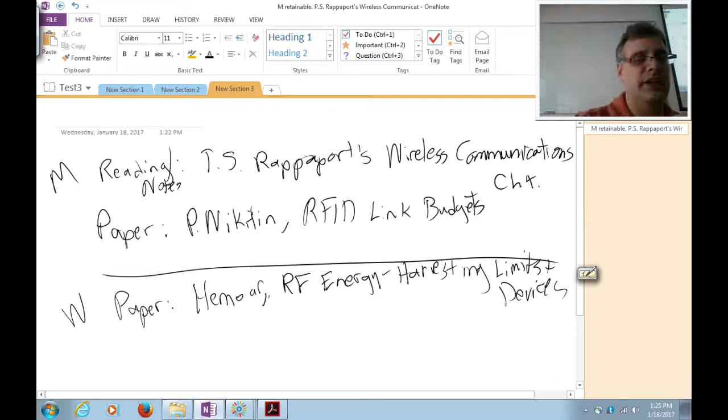Okay, any questions about the uploaded materials? No? So Rappaport's chapter 4 that I've excerpted and placed online is considered kind of the gold standard of the cellular industry. His book was the first textbook in wireless communications, published in 1996. It was pretty early on in the game. And that textbook became very widely adopted and is still one of the most commonly used textbooks in courses in personal and mobile communications, for example.

And my old advisor is actually a propagation guy. That's where he got his start. He was making measurements back in the 80s in factories and offices and measuring propagation. And everybody said, "What are you doing measuring all this propagation? What good is that for?" And then, in the late 80s, he finishes up his PhD, gets an assistant professorship, and the U.S. government decides it's going to allocate the next generation cellular band.

They're going to put PCS at 1900 megahertz, which had never been measured before, at least not in the scenarios they were talking about, outdoor to indoor, indoor to indoor, lower tier cells, where the crude modeling people had done in the past for UHF and VHF propagation just didn't cut it anymore. Well, here comes Ted Rappaport with all these great measurements and expertise. So it was the right expertise at the right time at the right place. And he was able to parlay that into the world's first wireless textbook.

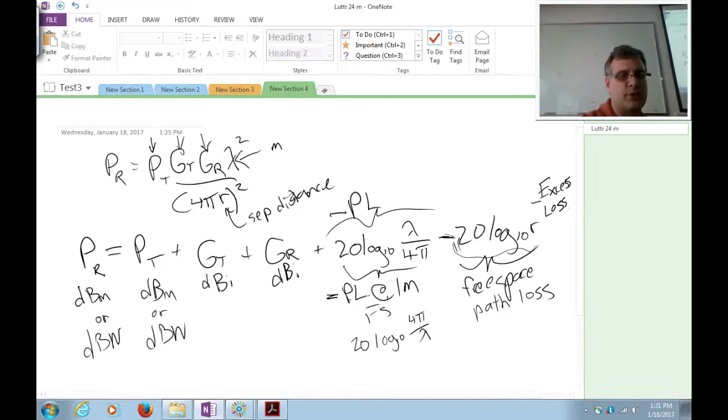And then, of course, you want to add extra losses. Call it excess loss. And there's two things that I'd like for you to pay attention to in Dr. Rappaport's article or chapter there. They're two interesting models that make a lot of sense when it comes time to do propagation modeling. One of them is path loss. When you plot path loss in the dB scale, this is path loss with respect to 1 meter free space. I go to 1 meter, and then whatever I get on top of that free space path loss is what I record here. And I plot that against log transmit receiver separation distance, actually 10 log 10.

What happens is, okay, the environment is very complicated. There's all these physical mechanisms that cause additional loss in the propagation environment. There are obstacles in the way. You've got to go through walls. You've got to go around walls. You've got to diffract. You've got to reflect off buildings. And so the real world here on planet Earth is very complicated, and it winds up being very difficult to predict. So, not surprisingly, if you go around and measure a bunch of path loss as a function of transmit receiver separation distance, you're going to get this huge scatter plot. You get a couple of outliers there too.

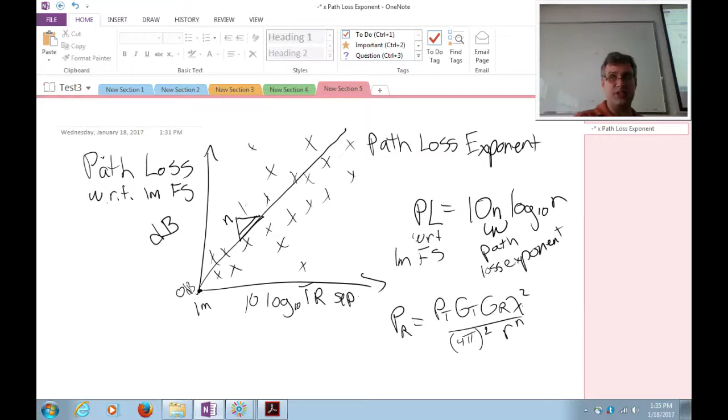10 dB is a factor of 10, 15 dB is like a factor of, I don't know, 50, 30, something like that, 30. That's a lot, plus or minus an order of magnitude and a half.

But it turns out that that's usually good enough to design a cellular network. So just with that one piece of information, the path loss exponent, you can capture the behavior roughly of an environment. If I am outdoors and I've got a transmitter on a tower and I'm communicating to a personal device in this area, my path loss exponent, because of all the high buildings, that fits the data probably close to like 3.5, 4 even.

If, however, I move a little bit farther away from the city center with less buildings, maybe more houses and that sort of thing, the path loss exponent drops down to like 2.7. And if I get into relatively flat with some sparse trees, maybe farmland, then path loss exponent can go down to like 2.4 or 2.5.

If I go indoors, it shoots back up again. I got all these walls to get through, so things become very lossy. Not uncommon to get path loss exponents of 5 or 6, or even higher. There are some scenarios indoors, however, where you can get path loss exponents less than 2. That's less than free space. How would that be possible? Can anybody think of an environment that would happen in, where on average you would get more power than free space?

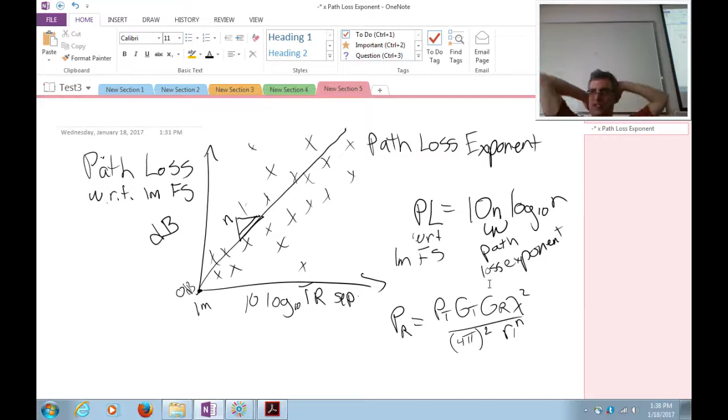But this is nice because anytime you change the frequency significantly or change your environmental configuration or just try something new in terms of your environment, whether it's frequency, stuff in the area, you got to go in and remeasure your path loss exponent.

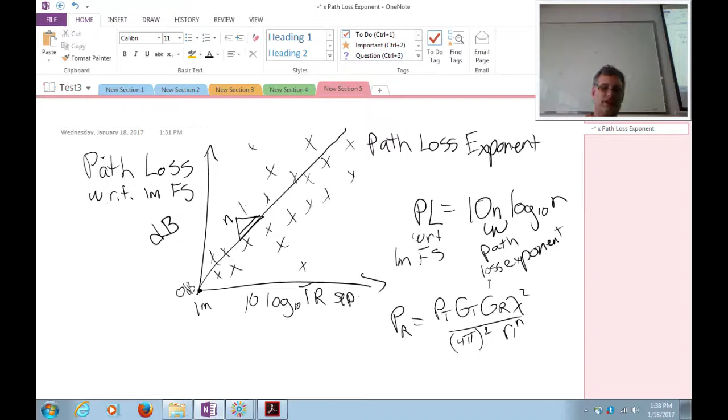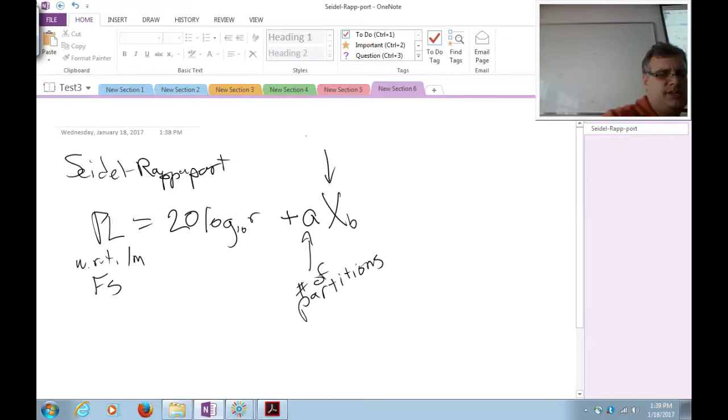And then there's another model. This one's called the Seidel Rappaport model, where path loss with respect to 1 meter free space is equal to 20 log base 10 R, so free space path loss, plus additional factors: number of partitions, and this is partition loss. So sometimes this is called the partition model, although the formal name should be the Seidel Rappaport model. And you can have as many of those terms as you like.

And this model is interesting because it adds a little bit extra site-specific information, and it gets a little bit better accuracy because of that. You can get accuracies down to like 5 or 6 dB in many instances. It's a lot better than the path loss exponent model. But the price you pay is more complexity. You have to find a way to get more information into your propagation model.

So for example, one of my grad roommates in college, his name was Roger Skidmore. He started a company with Ted Rappaport, and that got sold to Motorola. And their core product was this planning tool that used the Seidel Rappaport model.

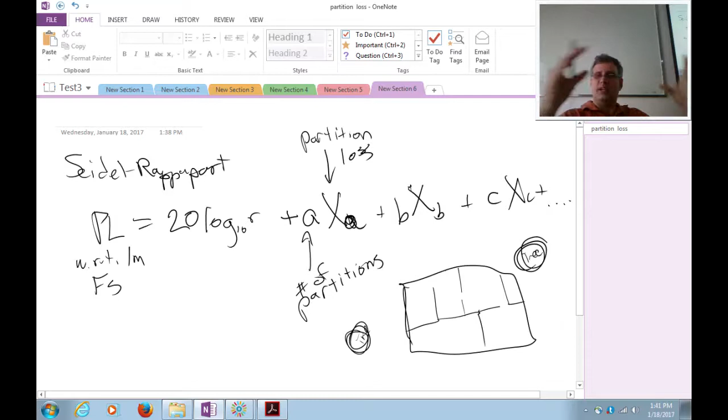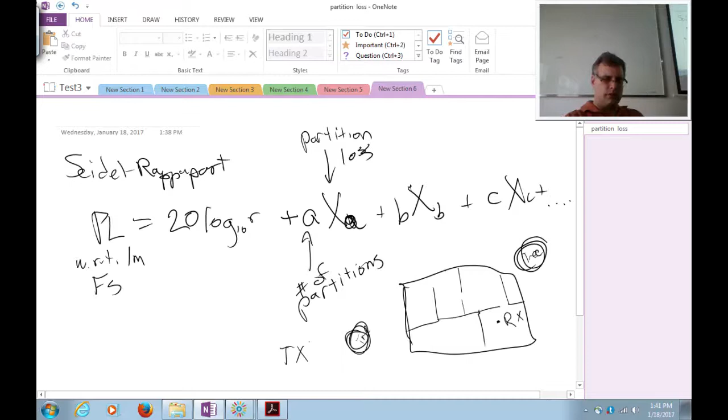And he could basically suck in a blueprint from a building, for example. Say here's a building. It's got rooms in the building. Here's the blueprint. This is a terrible building. And let's put some trees outside there. And you could drop transmitters and then predict, make a heat map in real time. So for example, if you had a transmitter here and a receiver here, what would the Seidel Rappaport model predict?

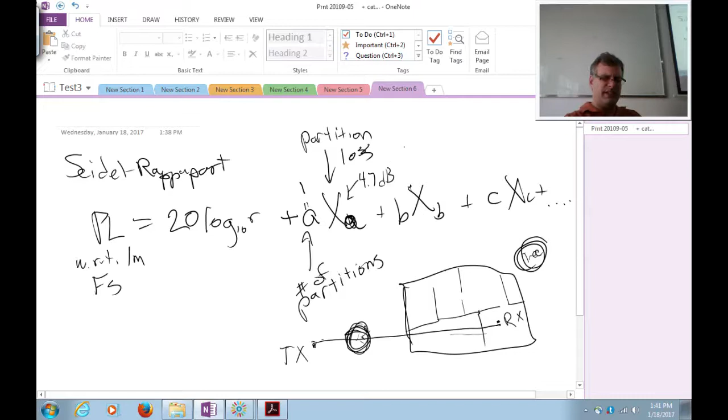It would draw a line between those, since it's easy for a computer to figure out distances between points, and then do intersection tests to figure out what type of stuff is in the way. So you would do 20 log base 10 of the separation distance, as if this was free space, but then you would add excess loss. You would say, oh, I've got one tree. And trees introduce, on average, a 4.7 dB attenuation per blockage at the frequency that I'm working at.

And then I am intersecting one outdoor brick wall. B is 1, and a brick wall introduces about 12.0 dB of attenuation. And I notice I have to go through one interior wall, a plaster wall. Plaster walls maybe only do about 3.7 dB at the frequency that I'm after, and there's only one of those too. So you just subtract off losses based on the type and the quantity of stuff directly in the link.

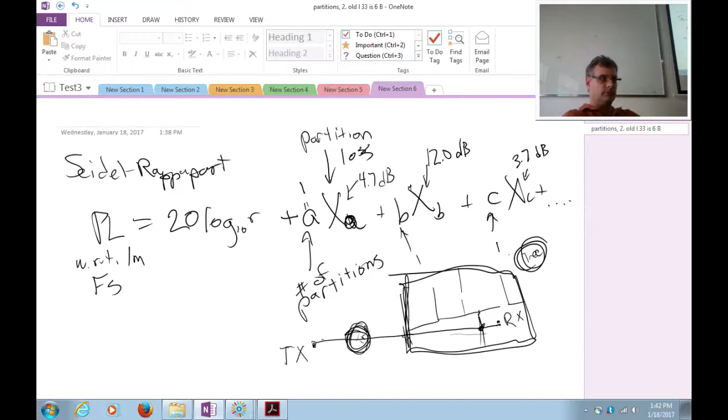So anyway, those are probably the two most important takeaways from that reading that's online in terms of propagation modeling. Does anybody have any questions before we move on? Okay. That's fine.

Okay. So let's take a little break from all the equations and analysis and talk about automatic vehicle identification. So the AVI systems have been around for a long time, especially in the proposed form. They really started to be worked on in earnest in the 70s.

And the whole idea behind AVI, this encompasses a lot of different applications. We can talk about highway tolling, often called open road tolling, which is what we think about today. But you can also use it to restrict access, like think a parking deck. And you can use it also for tracking and telemetry, to name just a few. You use it as an electronic license plate.

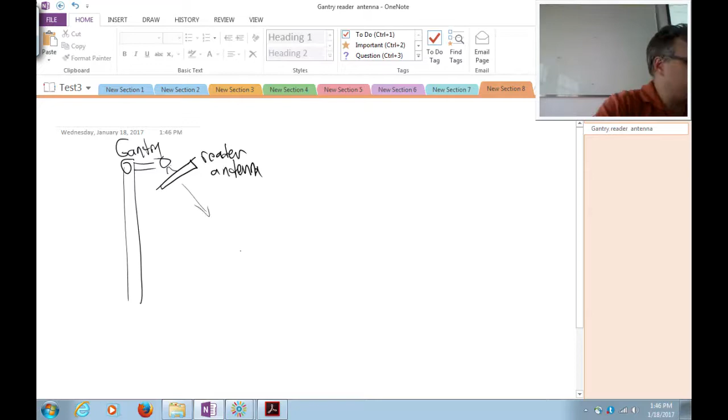So, what does an AVI system look like? We usually have this thing called a gantry. It's a big superstructure that goes over the road, and you put your transmitter reader antennas here. And you kind of angle it down, and there's an illumination zone. And you engineer the illumination zone so it covers a specific area on the lane. Remember, this is a three-dimensional problem, so you might have a multi-laned highway that you're tolling cars on, and you may need to figure out which lane they're in, so that you debit the right account and know the right person has gone through the right lane.

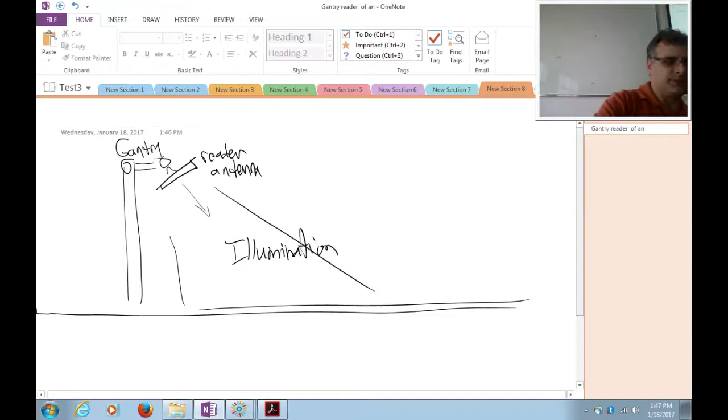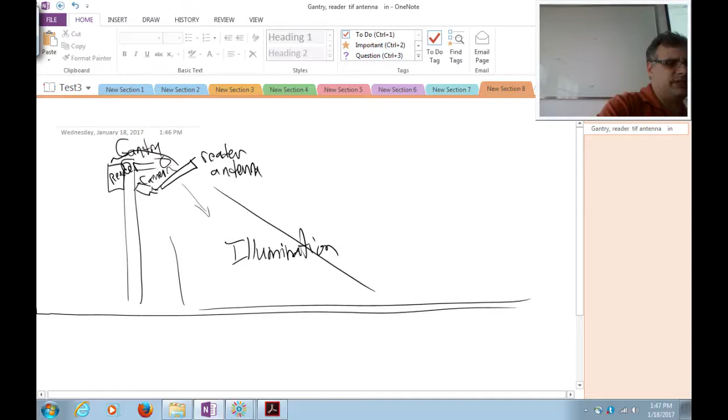And of course, there's all the other components up here. There's often an electronic reader up near the top. There can be a camera. Sometimes the camera just needs to take a picture of the car so that they can mail you a picture of your car when you didn't pay the fine or the toll properly. Other times the camera is used to read your license plate and do character recognition on your license plate. It's sort of a backup in case they don't get a proper read off of the RFID tag.

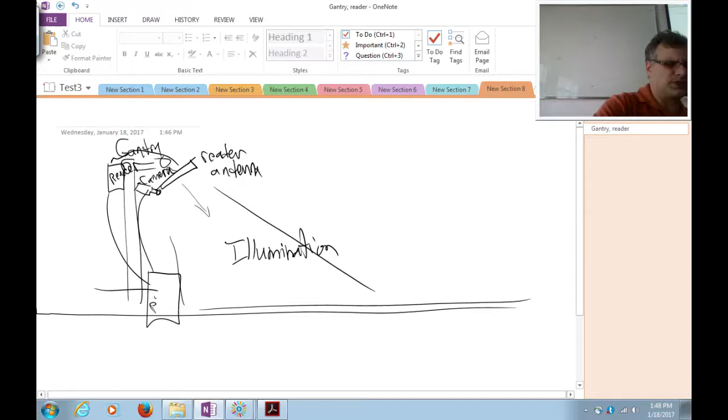And these are all connected, along with other peripherals, to a roadside unit. This is sort of the brains of the operation. This coordinates all the peripherals, the reader, the camera, any other things like maybe a gate that opens or closes when the proper toll is coordinated, or sometimes there are some inductive sensors to sense the presence of the vehicle.

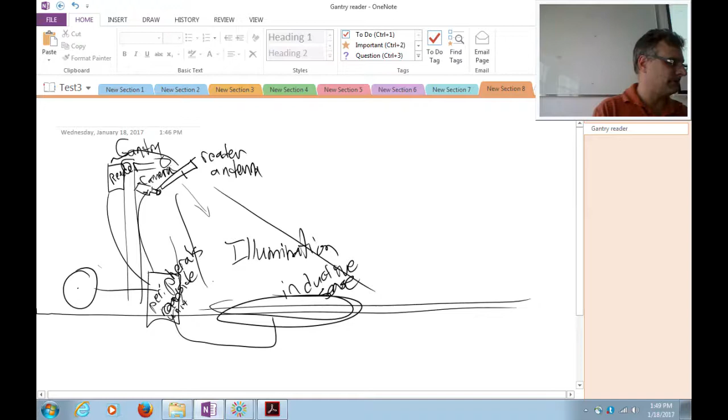So these automatic vehicle tolling systems are actually quite complicated. They're really multifaceted embedded systems projects that require a lot of engineering. And there are only a handful of companies in the world that do that. And of course, the tags on the cars, there's a tag. This is supposed to be a car.

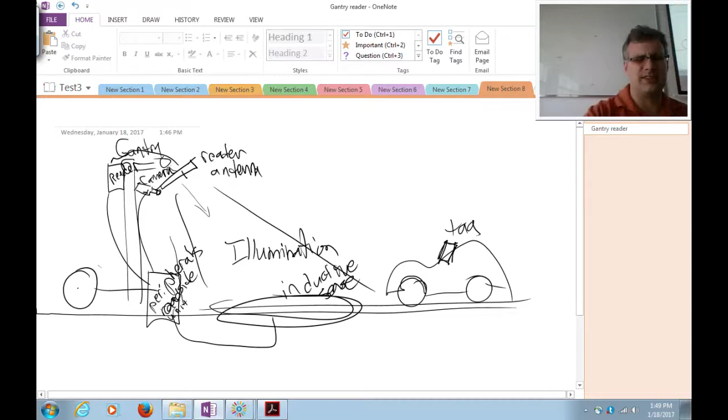Tags nowadays actually have the ability to harvest the RF energy. There are several versions and protocols of highway toll tags that harvest the incoming wave and then use modulated backscatter to send back identification information to the reader.

And this is a multi-billion-dollar industry. At least the tolls they collect is a multi-billion-dollar industry. This is a hundreds of millions of dollars industry in terms of worldwide equipment annually.

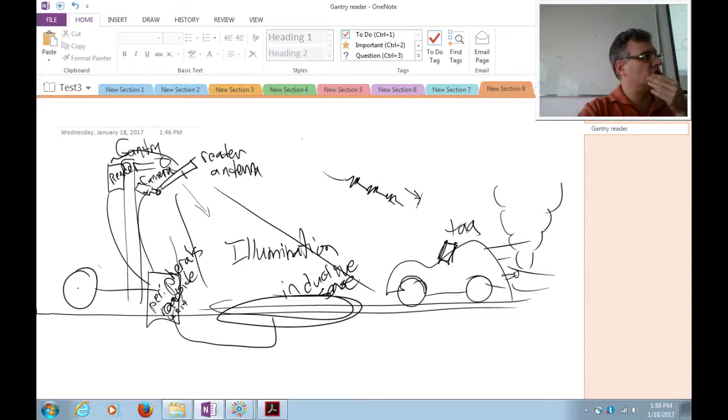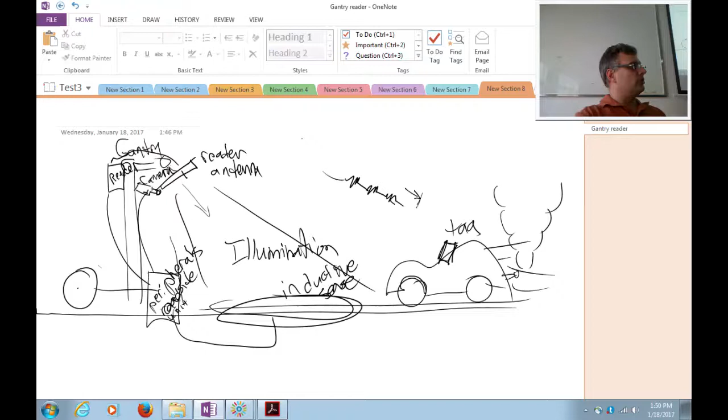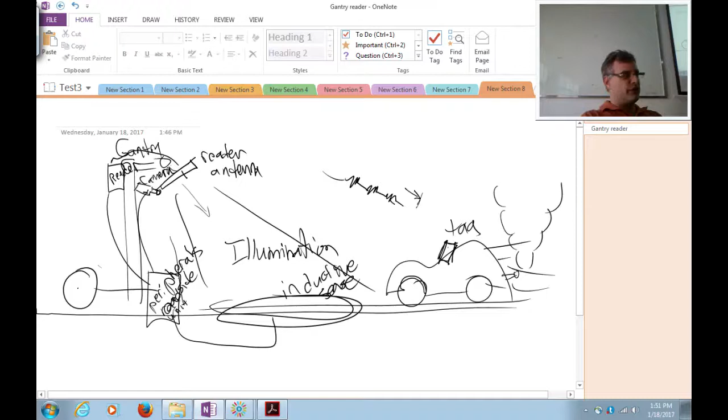The tag is usually behind the car, and then how if it is not illuminated? Oh, this is a good question. So, where do you put a tag normally? At the back, like of the car. So it depends on where you are. Different tolling agencies have different practices and different types of tags that you can place in different things. So for example, one of the things you have to worry about with this tag is in North America, everybody puts them on the windshield because that winds up being a really nice angle to cover as you go under a toll tag.

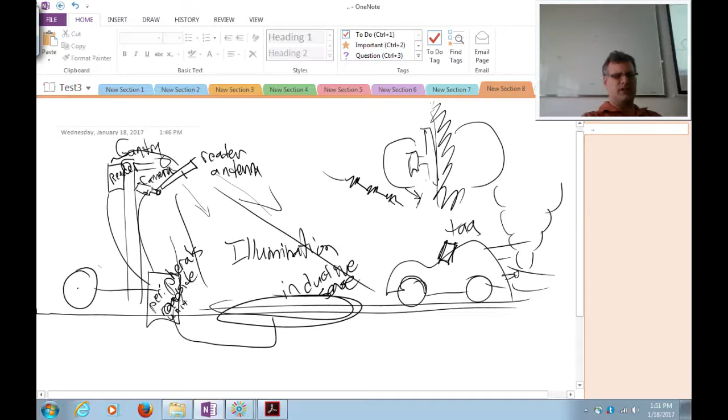And it turns out that RF passes through glass and plexiglass almost losslessly. There's only a slight degradation. In fact, sometimes there's a slight enhancement because you have this thing called pattern sucking. If you put an antenna, a little folded dipole with a chip, next to a lossless dielectric, the pattern gets a little bigger in this direction and a little bit smaller in that direction. So you actually can get a little bit of gain if you get the right dielectric up against that. And so that's when it's placed on the windshield.

Now there are other worldwide tolling agencies that will put it in other places in the car, or by necessity they'll want to put it on not just maybe a truck windshield, but also on the truck trailer that it's pulling. Whereas some people that are driving a motorcycle, here's my hog, tend to put it on the gas tank, which is metal. That causes all sorts of propagation problems because you're taking an antenna and laying it down on a conductor and essentially shorting it out. You have very bad mismatch losses. No matter how hard you try, it's almost impossible to undo with matching circuitry.

And so this is one of the reasons why they almost always have some sort of camera to do optical recognition on your license plate. Optical recognition on your license plate in and of itself is not the most reliable technique. You get dirt on your license plate and you misread the numbers, or the person drives by too fast, or maybe they took the plates off the car. Or sometimes the pattern recognition fails. It's a statistical process. It doesn't always work right.

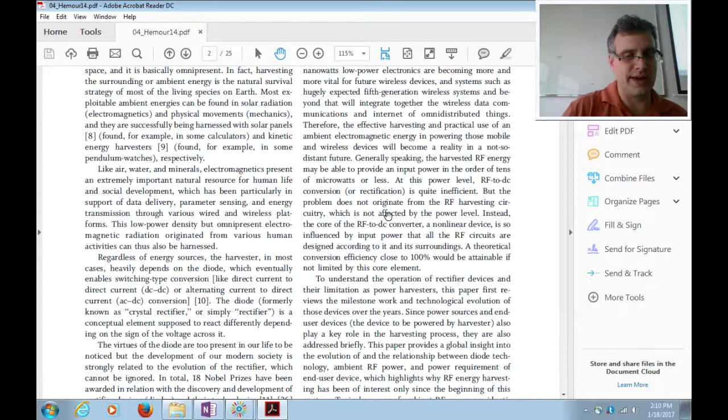Let's talk about what this is. This is written by Hemour and Wu. There are a couple really good graphs here I wanted to talk about, and I want to talk about a derivation that they do in here and kind of explain it in detail because it gets to the heart of energy harvesting. It talks about some fundamental limits, and then some of the devices that you can use in the future. There's a really good historical overview. He's got this picture of an arc radio transmitter from 100 years ago.

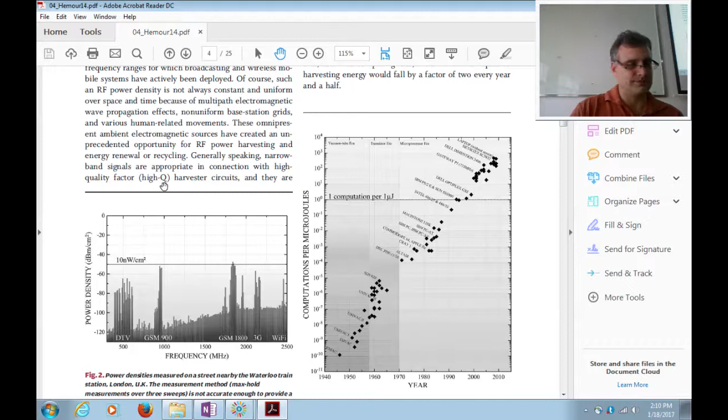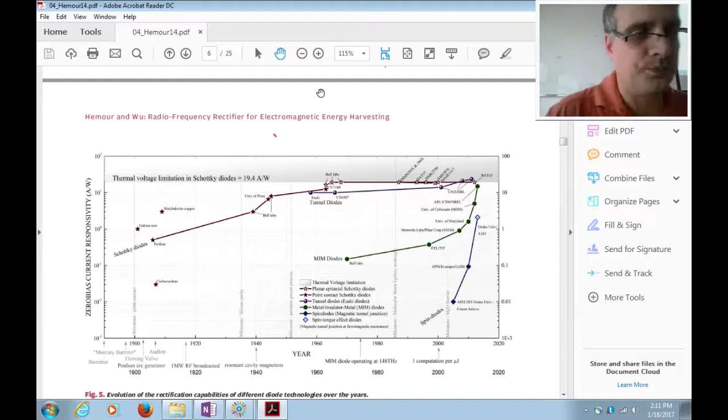Oh look, the Koomey graph again. You can't get away from it. The one that I'm most interested in showing you is this plot right here. So I'm going to get some annotations here. Let's see. Can I draw? Maybe not. Let's just get back to the graph here.

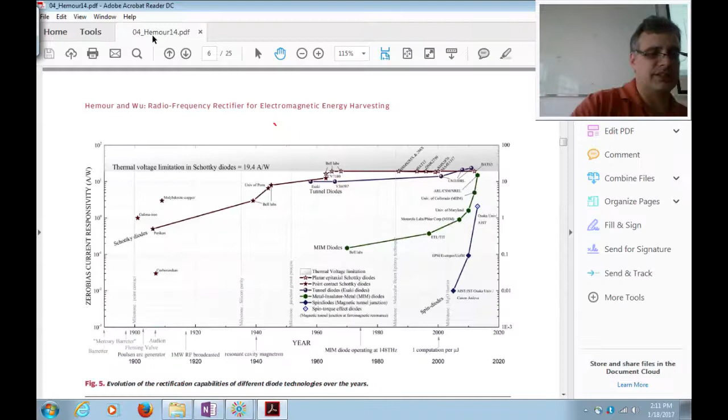This graph is a graph of different devices. So you see here we have on the horizontal axis time, year, up until the time this paper was written, which is just about a year and a half ago, 2015, 2014. And each of these lines represents a different type of device that's been used in RF energy harvesting.

So of course, what's the one all the way over here? Schottky diodes, that's right. Now, regular diodes have been used too. He doesn't really graph that, because Schottkys generally have lower turn-on voltage, so it cuts right to the more efficient way of harvesting energy. And of course, we've known about Schottky junctions for a long time. Remember, the transistor and the doped diode occur in the 1950s, late 1940s. But we knew that if you put metal next to a semiconductor, you get a Schottky junction. There's a charge diffusion, barrier regions, nonlinear response that results from the junction of those two materials.

And people were making detectors out of those pieces of electronics as early as the 1900s, 1910s. And you see here on the left-hand side, this logarithmic axis is something that they call zero bias current responsivity. That is a big word, and I'll explain what they mean by that. But what they really mean by responsivity is how curvy the VI characteristic is. Okay.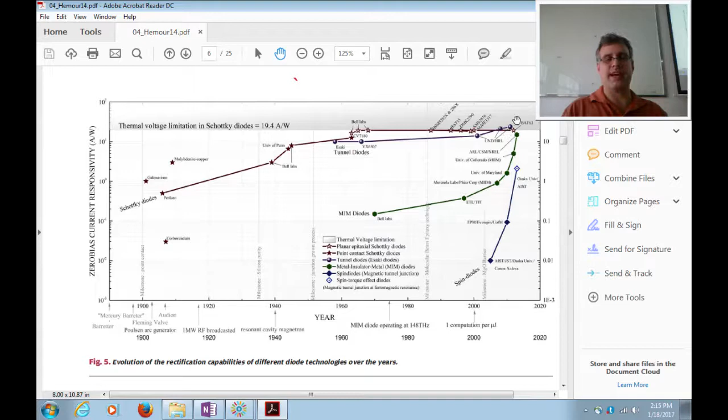And his point in this paper is that there are some of these newer technologies that are rapidly promising to sort of break the barrier when compared to the thermodynamic limit for Schottky diodes. In fact, there's this one point, I don't know if this might come from the author's earlier work or another work. He's written some papers recently on the tunnel diode as a harvester. You see it already poking above the thermodynamic limit of the Schottky diode. So that's promising. Anyway, it's a good read.

And now I'll switch to a little explanation of a derivation that they do in here that's actually very important. So let's start off with just a regular diode. Here's my diode.

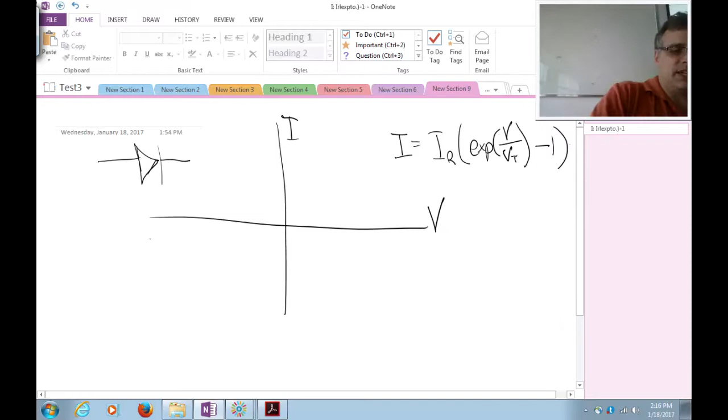And every diode has a VI characteristic, right? Voltage on the horizontal axis, current on the vertical axis. And I can sort of write a generic diode equation: I is equal to some sort of reverse saturation current times EXP of the input voltage over some sort of threshold scaling voltage, minus 1, right? And this gives us a familiar form. Anybody who's studied electronics has seen this curve before.

It's this kind of exponential nonlinear response that a diode has when voltage is excited across it. In one direction, it quickly starts acting like a short circuit. In another direction, it quickly has the slope of an open circuit. And here it's kind of somewhere in between. Okay, that's good enough. Now, you'll see this is almost device agnostic. I've just put some physical characteristics here. You could call this the threshold voltage. You could call this the reverse current, reverse saturation current.

And sometimes you'll see various forms of this. VT for a Schottky diode, for example. What is this a function of? Well, people have often written this as N times V little t, where we call this the thermal voltage. N is your ideality factor. It's a unitless number, ideally 1. Ideality factor, or sometimes ideality coefficient.

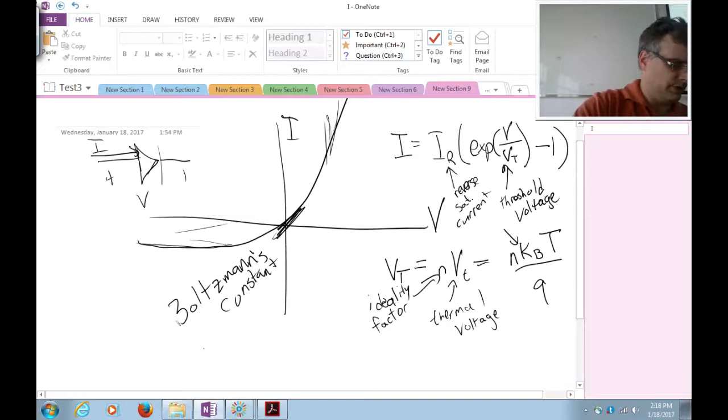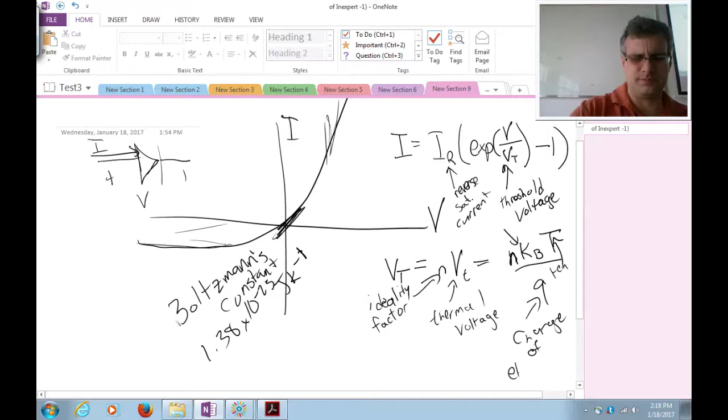And then the thermal voltage can be written as KB times the operating temperature over Q. This is Boltzmann's constant, which of course is 1.38 times 10 to the negative 23rd joules per Kelvin. This would be the ambient temperature in Kelvin. And of course the ideality factor, ideally that should be 1, and then Q is the charge of an electron in coulombs.

Real quick, give you the value of that so that you can have it in your notes. And that should be it. No, internet's out. You can look it up.

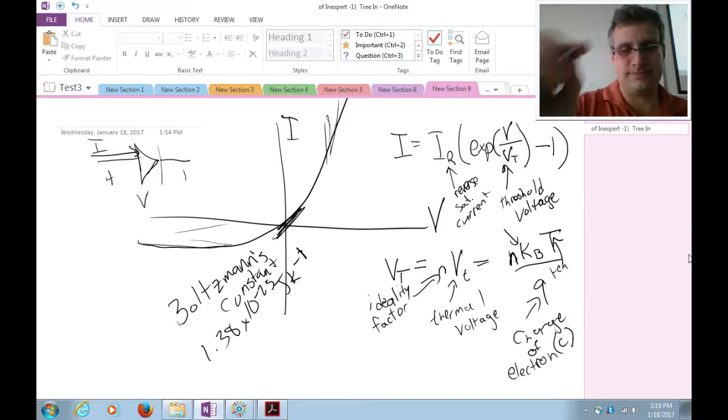Okay, the interesting thing here, of course, is that all of these we actually don't have very much control over, right? We've got Boltzmann's constant. That's a fundamental constant. Nobody's got control over that. Q, charge of an electron, you can't change that. I guess you could change the operating temperature, but this is in the Kelvin scale, right? So if we're talking about temperatures that we live at, that's actually a very narrow range in the Kelvin absolute scale, right?

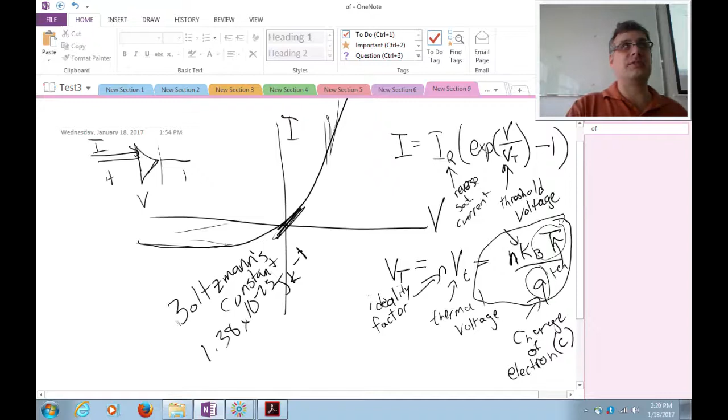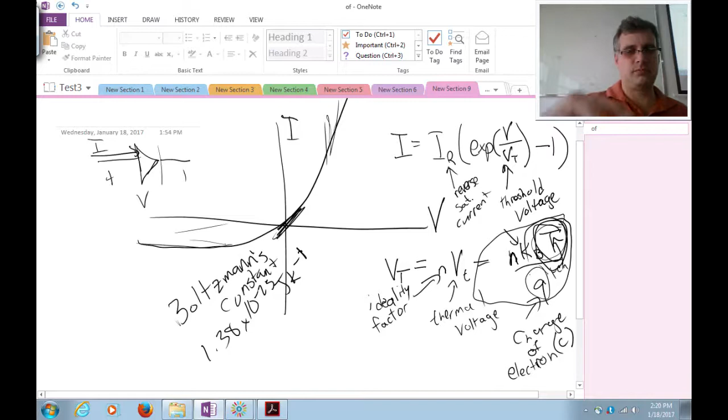Freezing is 273. Kind of Shenzhen weather in the summertime is about 300 Kelvin. There's not that much room in between, right? That's a 10% difference at the end of the day. So we really don't have that much control over this thing either. So what does that all mean? So let's say we had our old diode equation. I is equal to IR EXP V over ideality factor thermal voltage. This is part of the proof that Hemour does in his paper.

So let's expand this as a Taylor series. Do you remember your high school Taylor series for EXP to the X? That's equal to the sum from n equals 0 to infinity of x to the n over n factorial, right? And from that you can actually just get the Taylor series without doing all that differentiation. This is basically equal to 1 plus x plus x squared over 2 plus x cubed over 6, etc.

And one of the important things to realize about this is that when we talk about energy harvesting in our world, especially the low-powered world, x is going to be small. So as a Taylor series, I can take just the first 3 terms of this and get a pretty good estimate of what's going on. So what I'm going to do now is plug that approximation into these first 3 terms here.

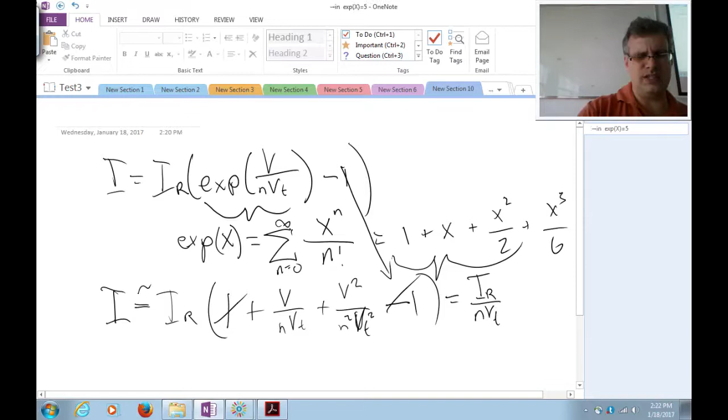So I got 1 plus V over N VT. Okay, that's my linear term. Now I also have the squared term, V squared over N squared VT squared, minus 1. I'm just going to bring down that minus 1. Of course, that cancels with the plus 1 there. So what I really get is IR over N VT times V times 1 plus V over N VT.

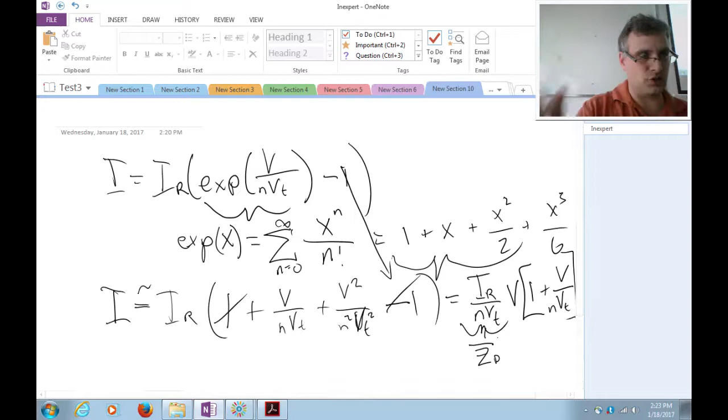This guy over here, I'm going to call this 1 over ZD, the impedance of my diode. That's basically the small scale resistance I would see when I put the diode into an AC circuit and give just a little bit of AC across it. It'll look like it has that resistance. But of course, it's nonlinear, so really I can't ignore this last term as well.

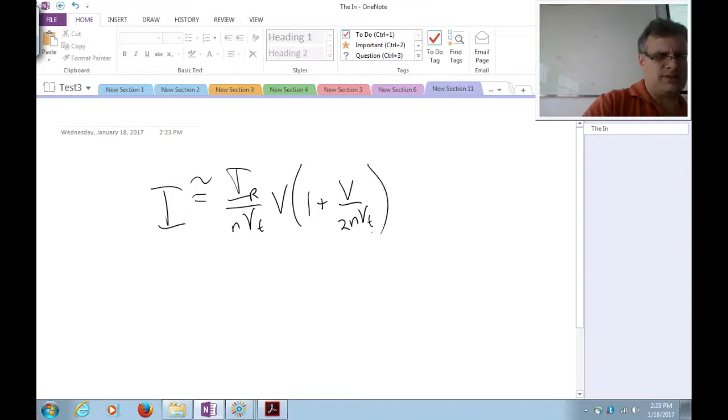And the key to this whole analysis is to look at the responsivity, which he defines as basically the second current derivative at some particular bias point. In this case, we're going to use V bias equal to 0.

Professor, where did the 2 come from? Where did the 2 come from? Was it on the previous slide? Yeah, that should be part of the Taylor series expansion. If you multiply this together, you should get what we had on the previous. Hopefully I didn't drop a 2. Okay.

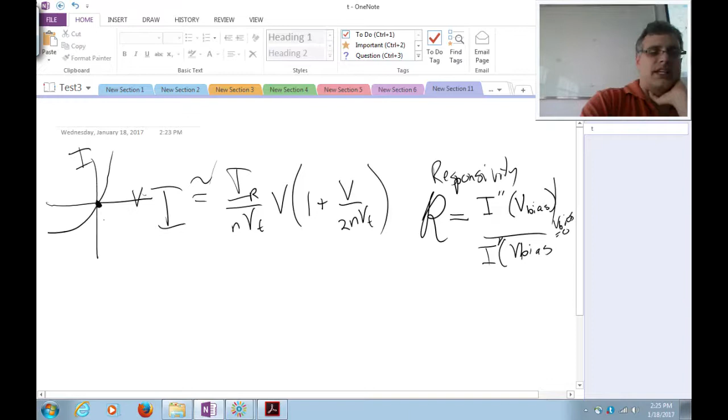So this responsivity, this is actually the second derivative of current as a function of voltage divided by the first derivative of current as a function of voltage. And you can kind of think of this as quadratic curvature. How curvy is that diode characteristic at a particular point? We're almost always interested in the 0 bias point, where the bias is equal to nothing, because that's what a cold start device would experience.

In energy harvesting, you can take electronic devices like diodes and do something called body biasing. It's like you give a little bit of bias, and in some instances that makes them work better. We're not going to concern ourselves with that, you could spend a whole course just talking about diodes. We only want to spend the next week or so doing that.

Okay, and so what would it be for this Schottky diode? Well, the second derivative and the first derivative of current. Let's do the first derivative of current first. We can just basically eliminate this term here and look at the slope. That's what we called 1 over ZD, or IR, saturation current, over NVT. And up here, if we take the second derivative, we find that that is actually 1 over NVT times ZD. So 1 over ZD, 1 over NVT ZD.

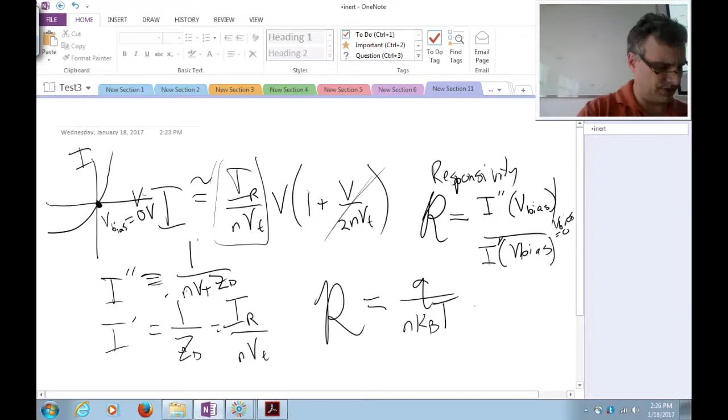Thus, the responsivity, when you divide those two, should be equal to Q over N, Boltzmann's constant, times temperature. We call this responsivity. So 1 over N thermal voltage, and it's really only a function of the ideality factor, which we say is 1, and then these 3 things which we don't have much control over.

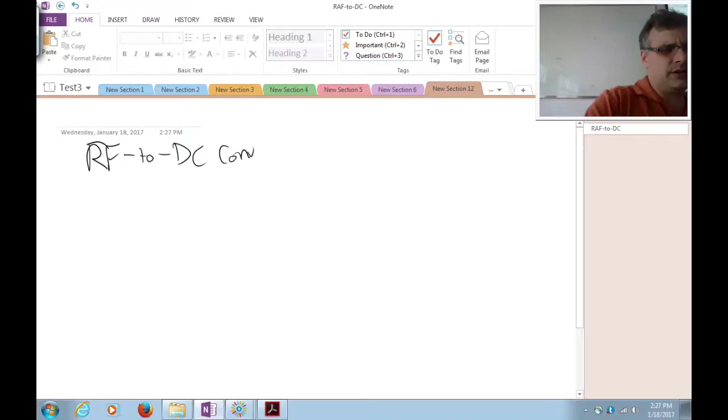And that's important because what Hemour shows in this paper is that your RF to DC conversion efficiency eta, so eta is some number between 0 and 1, 1 being 100% conversion, 0 being nothing, at low powers

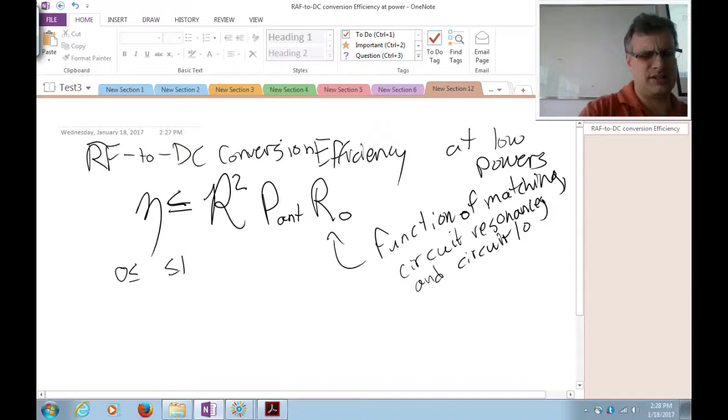this is going to be less than or equal to the responsivity squared times the power from your antenna times some factor R naught, which is a function of matching, circuit resonance, and circuit losses. But this is the real killer here, responsivity squared.

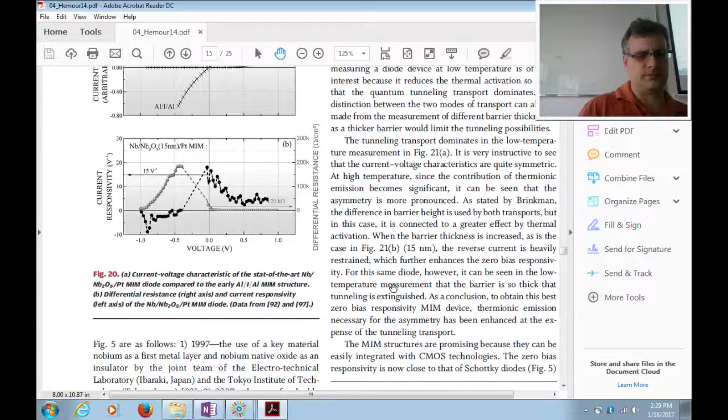We said that the efficiency is related to responsivity squared, and responsivity in the case of a Schottky diode can't be any bigger than Q squared over Boltzmann's constant squared, T squared in the denominator. And that's maybe the biggest takeaway from this paper. Go ahead and read through it. And he's got a sort of more long, drawn-out proof of this in this historical survey paper.

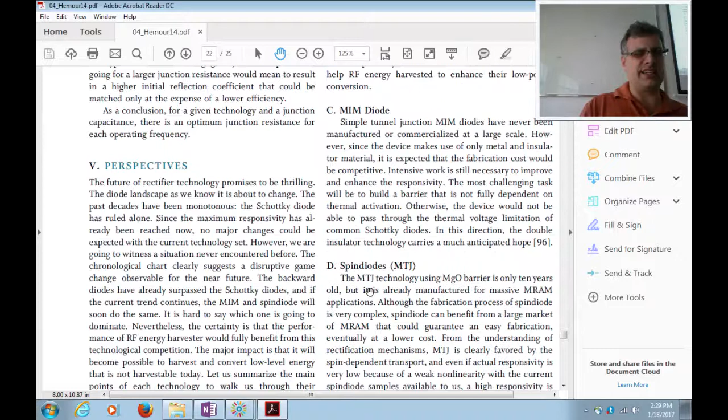But this results in that thermodynamic limit, what people often call a thermionic limit in energy harvesting. That's really what all these equations are. He's deriving that result. So that's the takeaway from this paper. Now there are also some other things, this is for Schottky diodes, right? Which is why we plateaued out at a certain responsivity a long time ago.

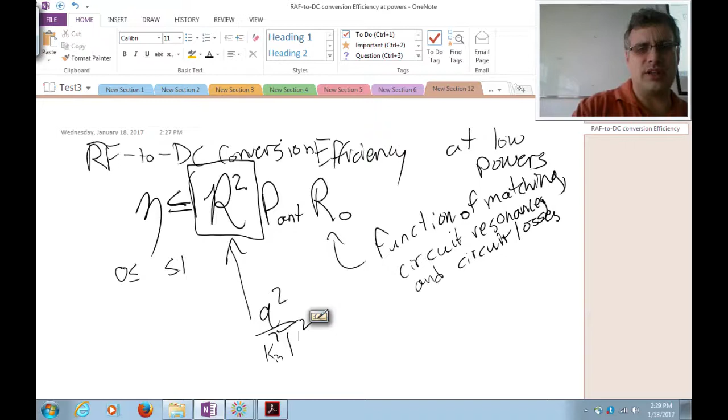If I could just illustrate the result graphically, what it's saying is that when you have a device at 0 bias, it almost doesn't matter what the device looks like. You could have a device with the following characteristic. At 0 bias, it's really the curviness, that second order curviness, which is what converts RF to DC, right? You think of it as a square law detector.

You know, the second derivative of the current divided by the first derivative is really the curviness at that point. And we're limited in a Schottky diode about how curvy we can actually make that point based on physical parameters. The charge of an electron, the average room temperature in Kelvin, Boltzmann's constant, ideality. Those are things that either we don't have control over, or we can't really change very much. And so what are some of the devices that have more promising responsivity?

Well, there's a whole list in here. I'll give you sort of the high-level version and you can read the rest for yourself. So we have Schottky diodes. We've actually done as good as we can possibly do with those. We pretty much can design a Schottky diode that operates at the thermionic limit. So these are good, but not getting better.

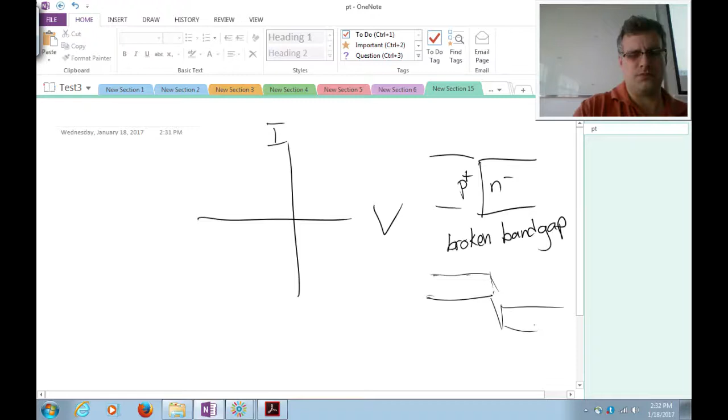Here's your N. And you actually make it so that the conduction band of one of your materials is at the same potential as the valence band of your other material. So what happens in that scenario is that your junction acts like an ohmic junction. You can actually get tunneling where carriers actually go into the band and then jump up to the conduction band in the other material. So here it looks like a resistive device for the tunnel diode characteristic.

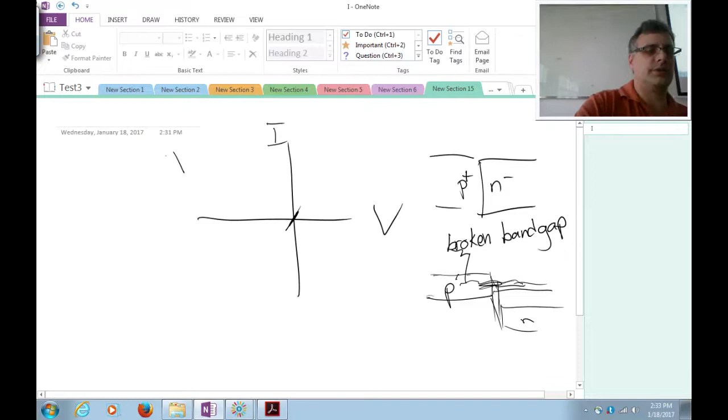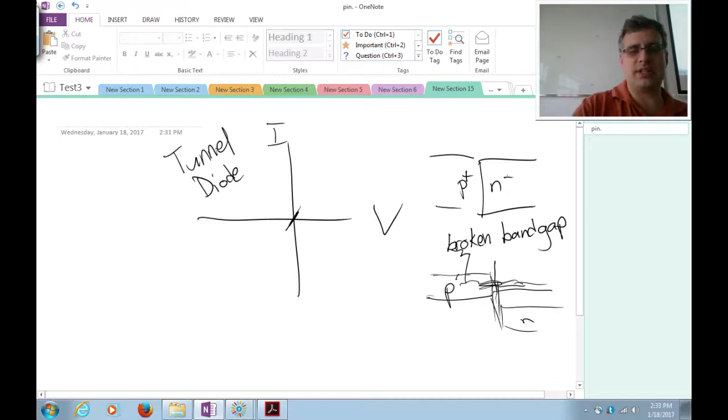And then as you raise the potential of this thing and kind of bring these back to more similar potentials, this starts to transition back into a diode characteristic. It looks like this. Let me flatten that out a little bit. It's a little more gradual than this. And so that's the classic characteristic of a tunnel diode.

It's a very interesting device because it's highly responsive. This change can happen on the order of tens of millivolts right here. And so that means that the second derivative is very high here, right? It's changing very quickly. And so if you reverse it, it's a little bit counterintuitive, but if you reverse this diode so that you put it in basically backwards, you can actually use this region as an energy harvester.

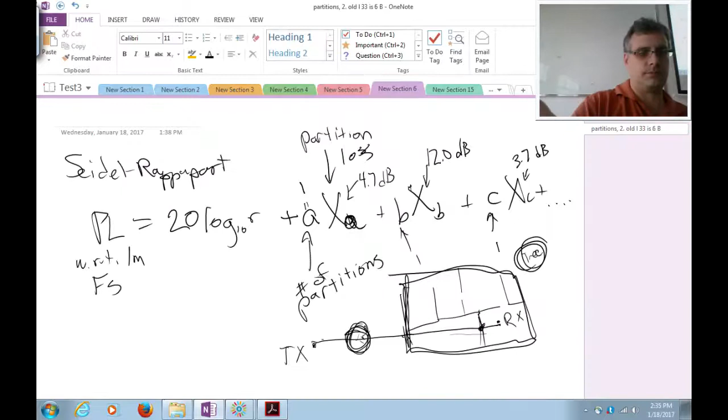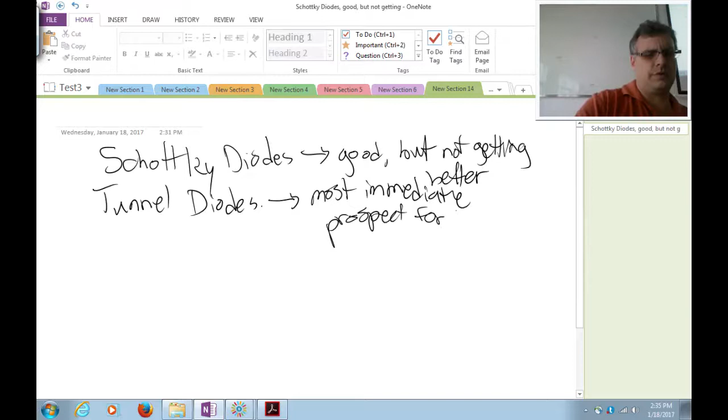And that's how they did some of those really high efficiency curves on Simon Hemour's paper in that big graph that I showed you. They used a tunnel diode and installed it backwards in the opposite polarity from what you would normally put a regular diode in for energy harvesting. So tunnel diodes, most immediate prospect for improved energy harvesting. Now, of course, one thing getting in the way is that we are still not very good at making tunnel diodes.

The tunnel diode was actually invented, I think it was about 1958 or 59, by a Japanese researcher named Leo Esaki. It was so cool to actually see a device exhibit quantum tunneling for the first time that he got the Nobel Prize for it. However, to this day, it is actually really hard to find anybody that will sell you a tunnel diode.

And the reason is, it's actually a neat device because it's got this negative resistance region, which means it makes very good oscillators and amplifiers. You can make reflection amplifiers out of it. You can make oscillators. If you bias it in that negative region, it should become unstable and start to oscillate.

However, there is always a cheaper way to do it with, say, CMOS devices, hooking up regular transistors in such a way, biasing them and making them have a negative resistance curve or serving as an amplifier or an oscillator. So it was a novelty. People were very excited in the 60s about tunnel diodes, and it just never really materialized. To this day, if you want to buy a tunnel diode,

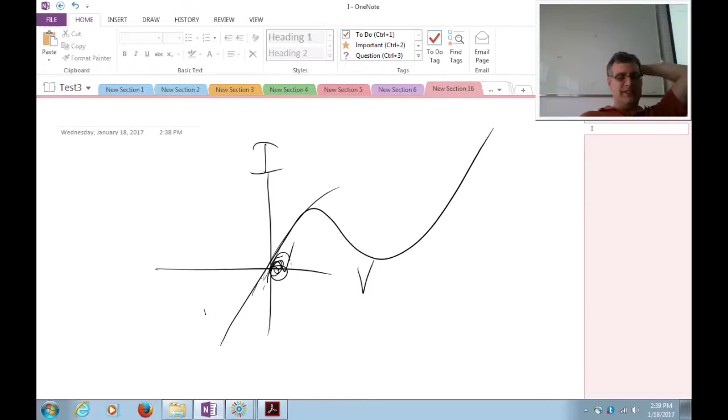My PhD student, Francesco Amato, just defended his thesis last week. I had to Skype in to the committee. And his thesis was employing tunnel diodes, not in energy harvesting, but in a low-powered communication system that would not have been possible without this device. Maybe we'll spend a day studying that later in the course, but it's kind of a neat experiment that he ran. So it's cool to use tunnel diodes again. That's what it comes down to.

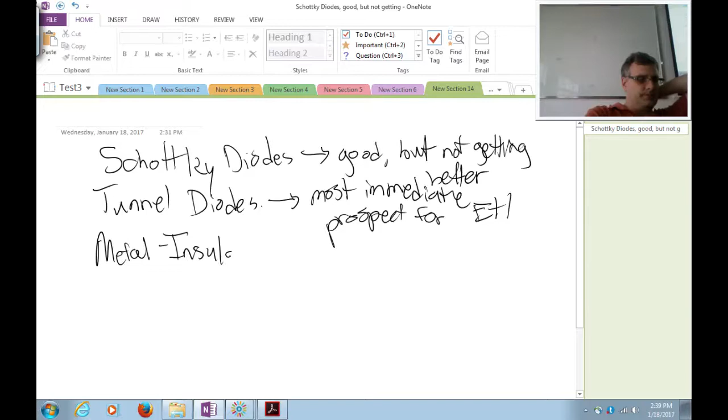And then there's metal insulator metal diodes, or MIM diodes. And these are promising but early. The physics theory behind these predicts high responsivity, but we haven't been able to build anything quite that high yet.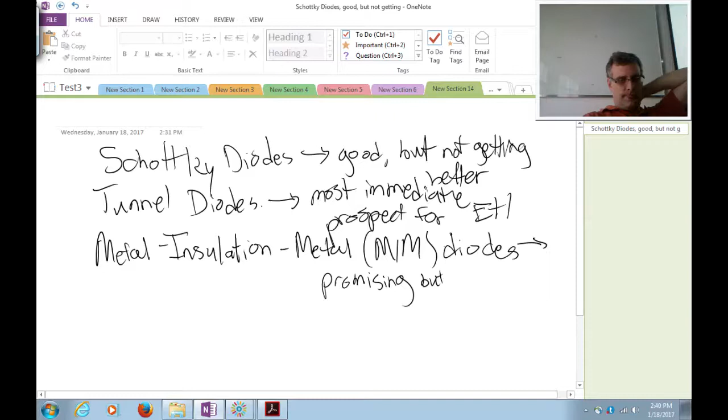And equally promising but early are these spin diodes that use a combination of tunneling and the spins of electrons to make a nonlinear thing. And that's very similar to the MIM diodes. They're promising but early.

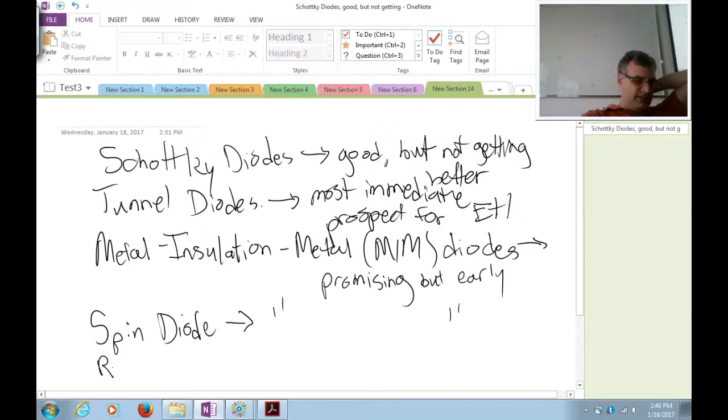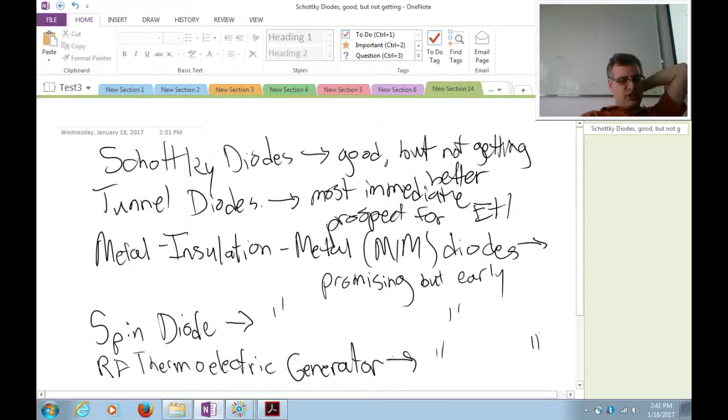And one thing that he's not mentioning in here that we'll probably spend a little time studying is something called an RF thermoelectric generator. Which, when you get to really small scales, we'll learn is actually an efficient energy harvester for RF, or can be. Okay, any questions so far?

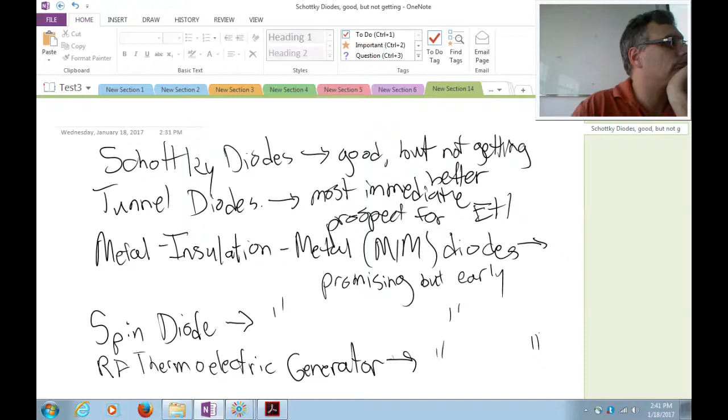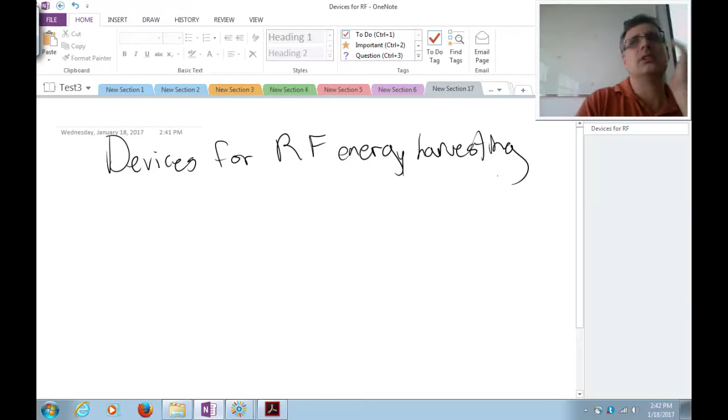Okay, well, let me shift gears and we'll do a little prelude to next Monday's lecture. We've talked so far about devices for RF energy harvesting, converting it to usable output power for driving circuits and logic and computation and sensing and all those fun things that we like to do with integrated circuits. So then the next thing we should mention is that that's not the only way to improve the efficiency of a harvesting system.

So if you think about an RF waveform, this is how classically we would harvest things. We have a sine wave and it strikes an antenna that goes into some sort of rectifier. And we talked about what rectifiers look like, what kind of diodes could you use in rectifiers. Just kind of scratch the surface. You could spend a whole course simulating rectifier circuits. That would be the most boring course in the world. So we don't want to do that.

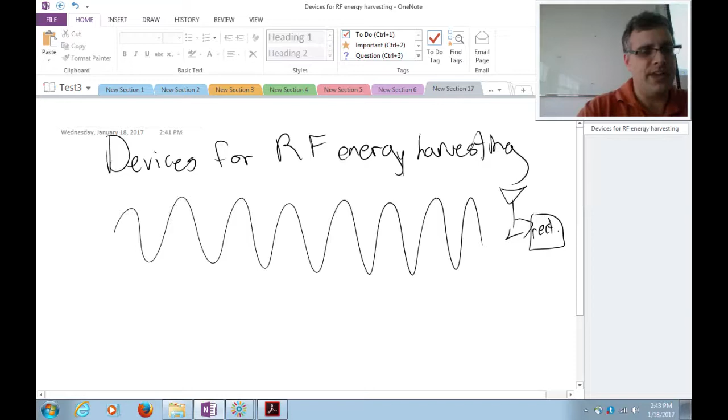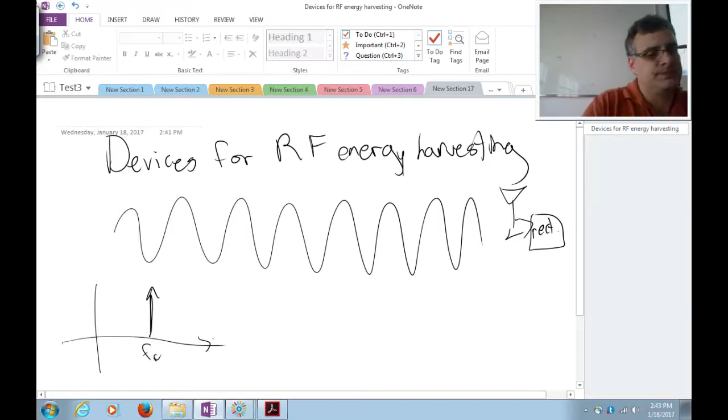Now, if I look at this signal on a spectrum analyzer, what do I see? The way I've drawn it here. Yeah, I see a little spike, right? At whatever the RF carrier frequency is. Call it f sub c. So now, there's a little brain teaser. What happens if I have a signal that looks like this on the spectrum analyzer?

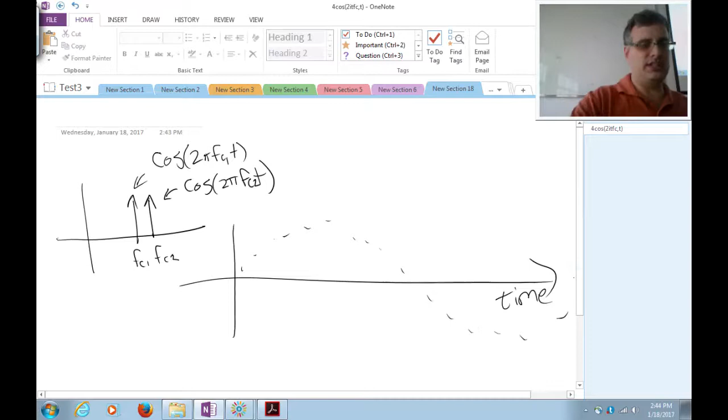Okay, so then let's change picture. Let's say I have a CW waveform that has the same time averaged power as my double carrier or two-tone waveform. And this is CW. So now let me ask you a question. Which one of these waveforms would be a better waveform to harvest for RF? Which one would convert more power?

I'm saying that the RMS average, if I average over a long time, is identical for these waveforms. So both of these, if you hook up an RF power meter, you would get the same number out of them. So 10 milliwatts, 1 milliwatt, whatever it is. Which one do you think would be better? The carrier waveform, because it will be of the same frequency. Mm-hmm. What's the benefit of being at the same frequency?

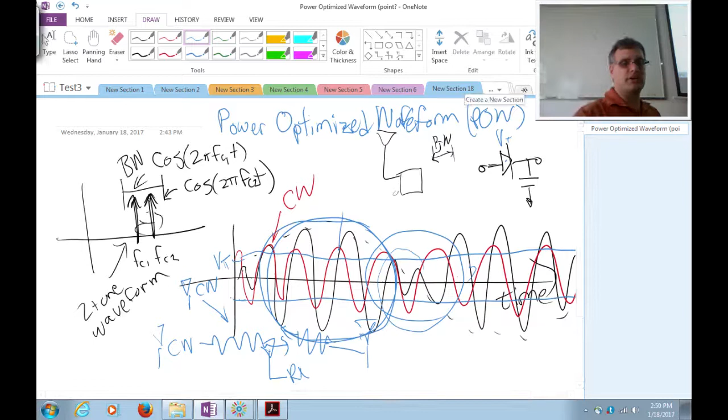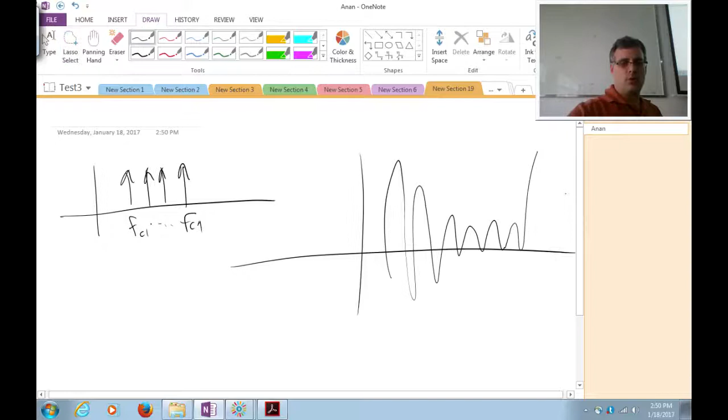And this is not necessarily a small advantage, because you can play this game for a long time, right? If you have, let's say, 4 tones that are very close together in RF, FC1 through FC4, what's that going to look like in the time domain? Well, now you'll have a really high peak. What happens is that the duration of the peak drops, but the peak value itself increases.

So you wind up concentrating more and more energy in a smaller period of time if you have more and more synchronized carriers. And you get conversion efficiency gains for that. So there aren't that many systems that actually practice anything like this at the moment. This was an idea that came out of research papers, some of it from our lab, some of it from the lab in Portugal. There's a company called PowerCast.

They've made a product where you can buy a chip, hook it to an antenna, and you buy another chip or a board from them, and that's their transmitter. And they don't do this, they basically do duty cycling. And it's mostly to get around the FCC laws in the United States. They basically turn the power on high, and then there's a little square wave low power, and then they turn the power on high, because the FCC says you can only transmit at this average power level.

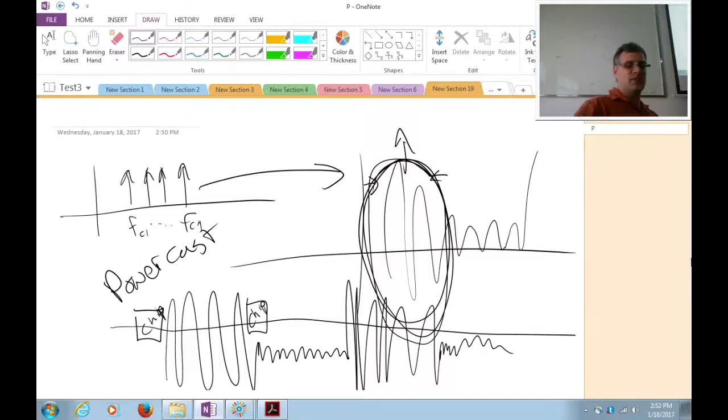And they define average power as, if you're transmitting digital symbols, you can average over multiple symbols. It's called average conducted power. And so this was originally conceived of as a way to increase the transmit power and efficiency in a circuit without violating the rules of the FCC. In fact, it's kind of interesting. There's always a high and a low. I said for averaging purposes, wouldn't it be better to have a little bit higher and then off?

But it turns out that with government regulations, the way that you can compute average conducted power, you can average over bit periods, maybe even multiple bit periods, but you cannot count times when your transmitter is physically off. So that's why there's always a little bit of residual there, just so that if the Federal Communications Commission checks it, they'll be satisfied.

Okay, we'll talk about this and analyze it a little more in depth next Monday.